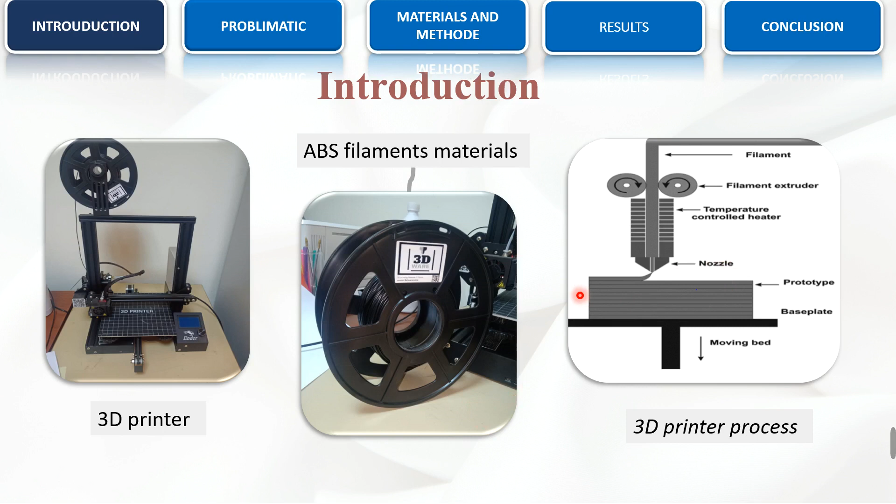The 3D printing technologies are widely used for the production of polymer components from prototypes to functional structures with difficult geometries. By using fused deposition modeling, it can form 3D printed parts through the deposition of successive layers of extruded thermoplastic filaments. The 3D printing can create physical objects from a geometrical representation by successive addition of materials. It is also a manufacturing technique to produce components in 3D using computer-aided design.

Because of the expensive price, permanent mechanical properties and chemical composition of the filaments, and also the useless waste plastics, a new solution is about extruding the raw materials of the 3D printer, starting with computer-aided design software for all parts and finishing by realization of the test bed.

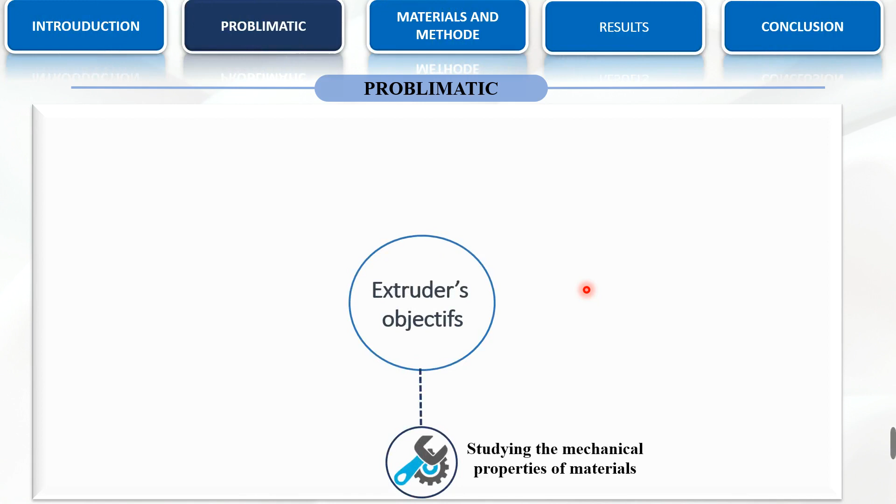However, this is about creating and producing the filaments used, for the purpose of studying the mechanical properties of materials, making the raw materials available immediately, reducing the price of the filaments used in 3D printer, and recycling waste plastics.

The extruder is a long continuous process of the polymers. It's used to produce tubing, tire treads, and wire coverings, so it pushes the raw materials into a heated tube, heated by two heaters fixed in the external side of the tubes.

The pushing process uses endless turning screw turned by a motor, then compressed into a shaping die which is used to extract the final product as filaments of 1.75 and 2.5 millimeters.

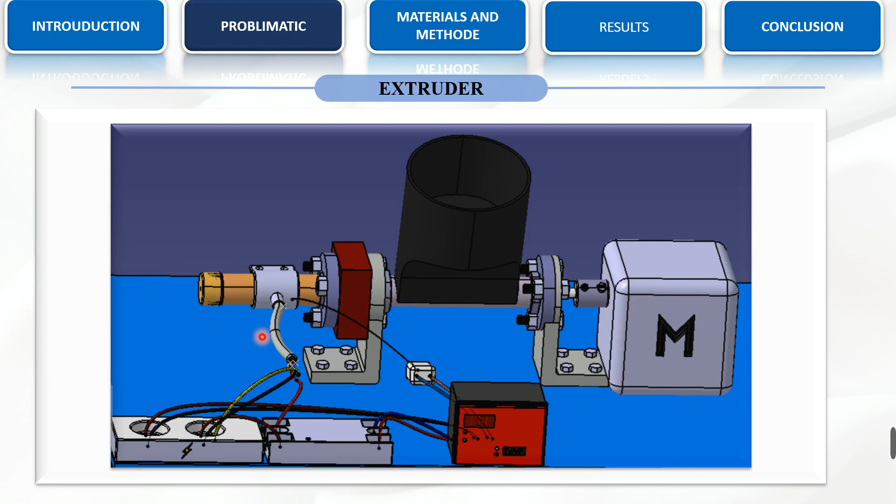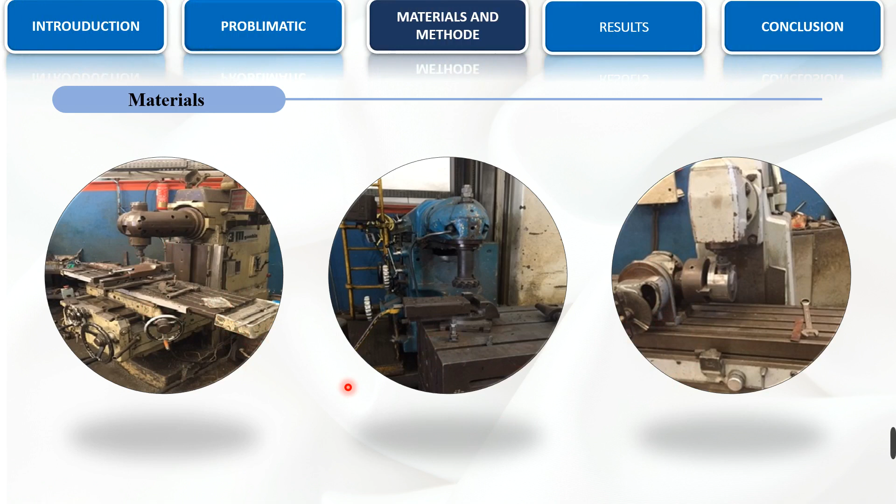So starting with the design using computer-aided design software, then fabricating the parts using mechanical turning machine, mechanical milling machine, the laser machine were used to perforate the shaping die with high precision of 1.75 and 2.5 millimeters.

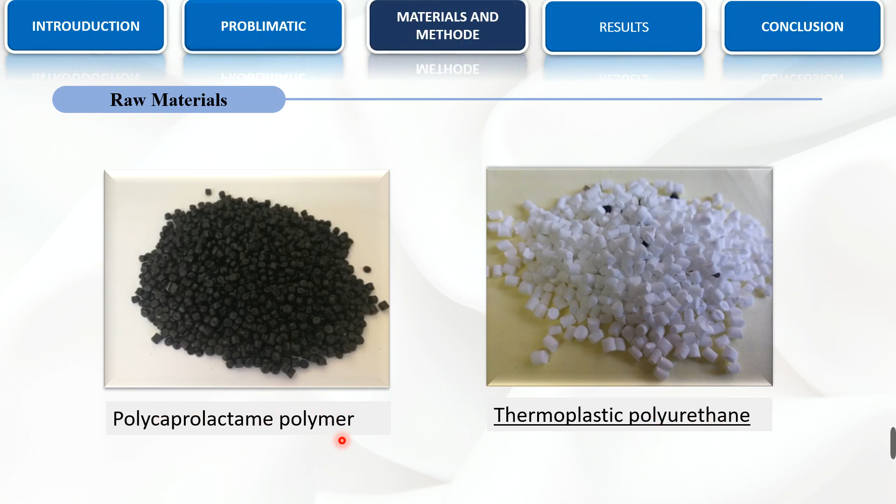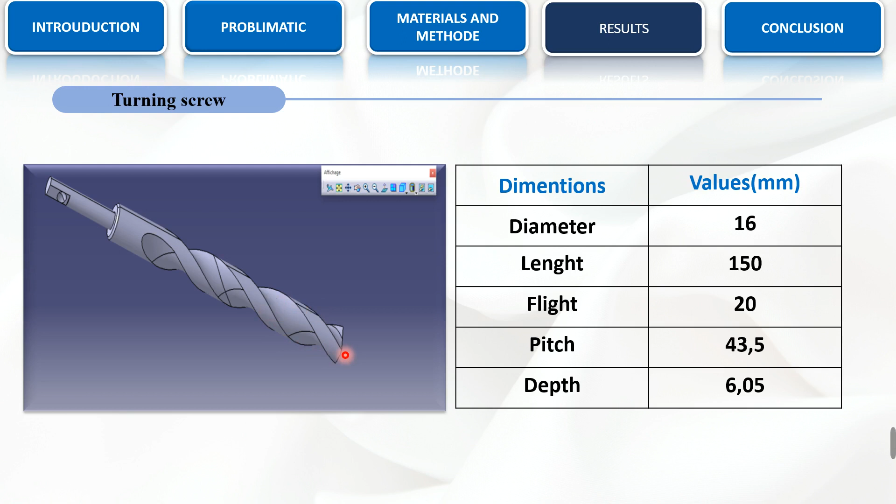So here we see the turning screw used has 16 millimeters in diameter and 150 millimeters as a total length, assuring the transfer of thermoplastic materials in order to be extruded in different final forms, thanks to its rotation around its axis of revolution and the geometry of the flights which have 20 of width for each, while fixing the pitch at 43.5 millimeters between each two successive flights with 6.05 of channel depth.

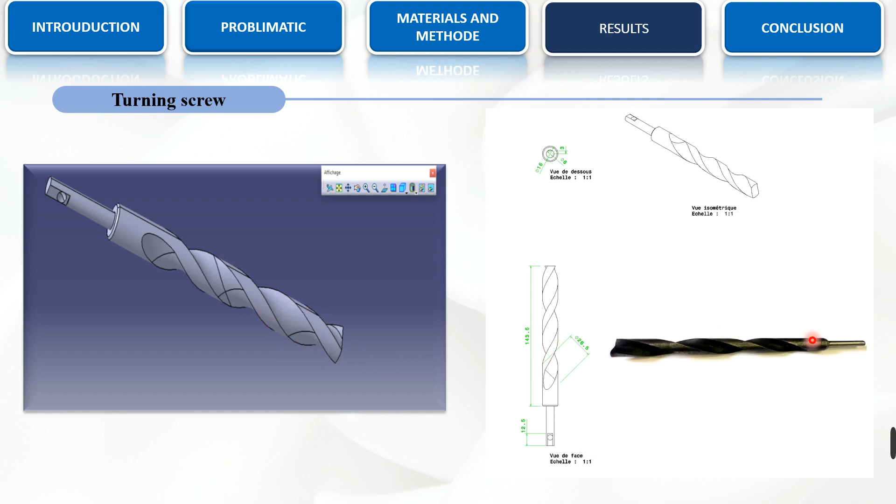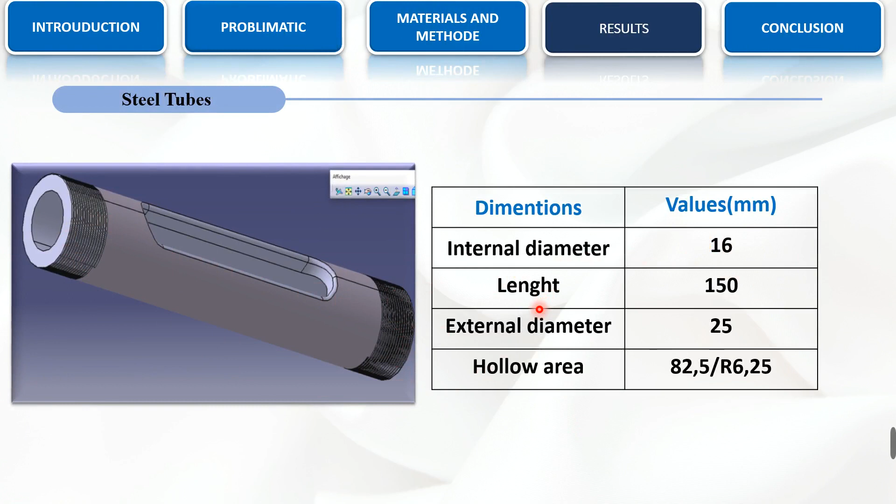We will pass now to see the steel tube which works as a chamber housing for the screw. The raw material is fed into the chamber through it. The tube used has 16 millimeters as internal diameter, 25 of external diameter, and 150 millimeters as a length, with a hollow area in the lateral surface which is consecrated for the material feed.

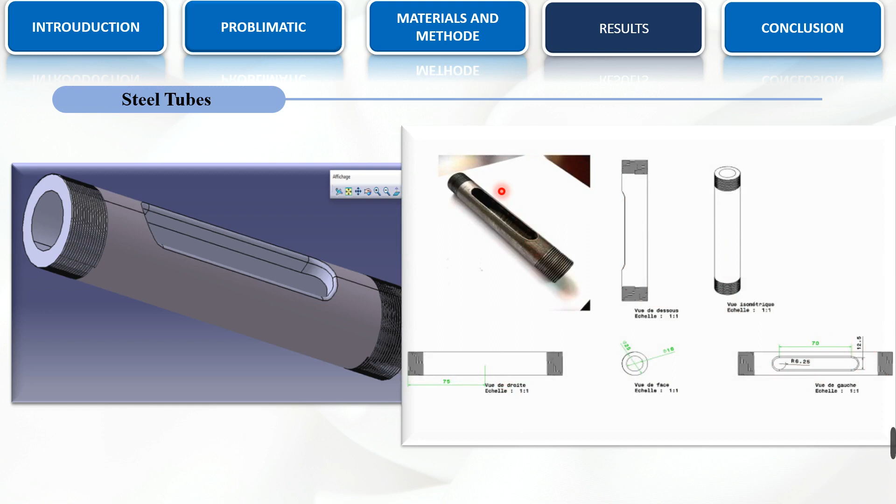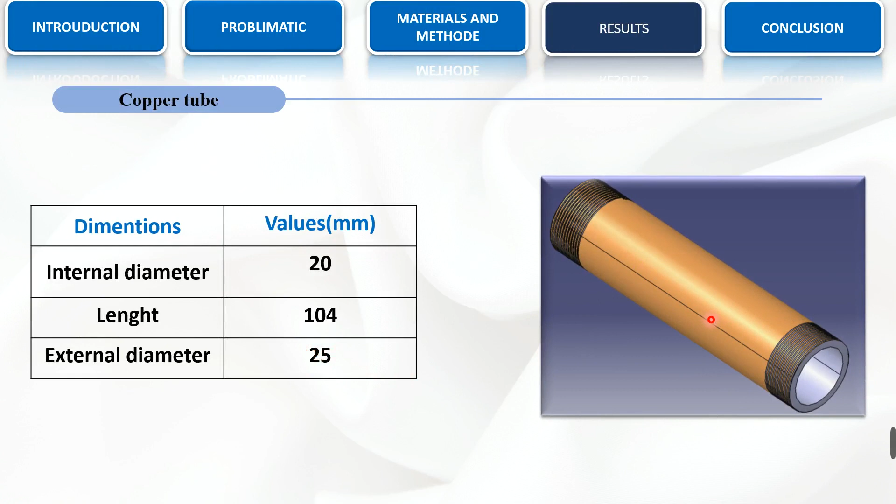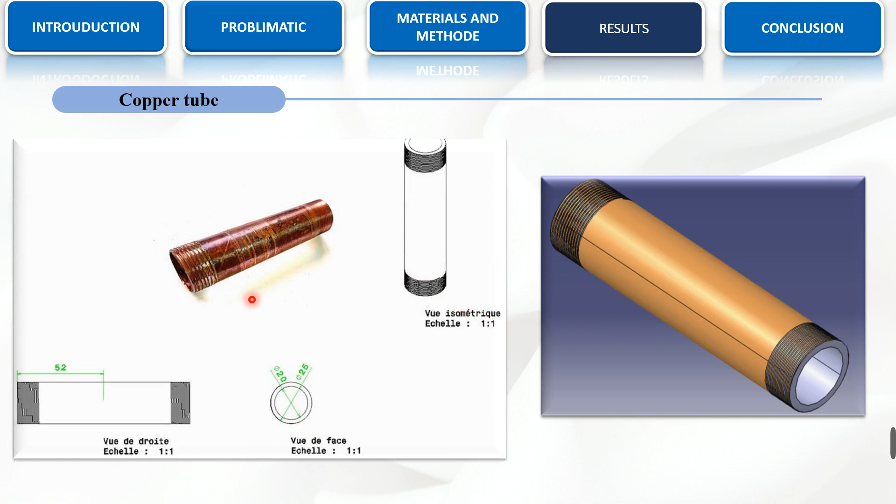So we are seeing now the copper tube, which is fabricated of copper material, which has a high thermal conductivity reaching 386 watts per meter Kelvin, 104 millimeters as a length, 25 and 20 millimeters of external and internal diameter respectively, to assure the fusion of the material inside by increasing its temperature thanks to heaters fixed on the lateral surface of the tube.

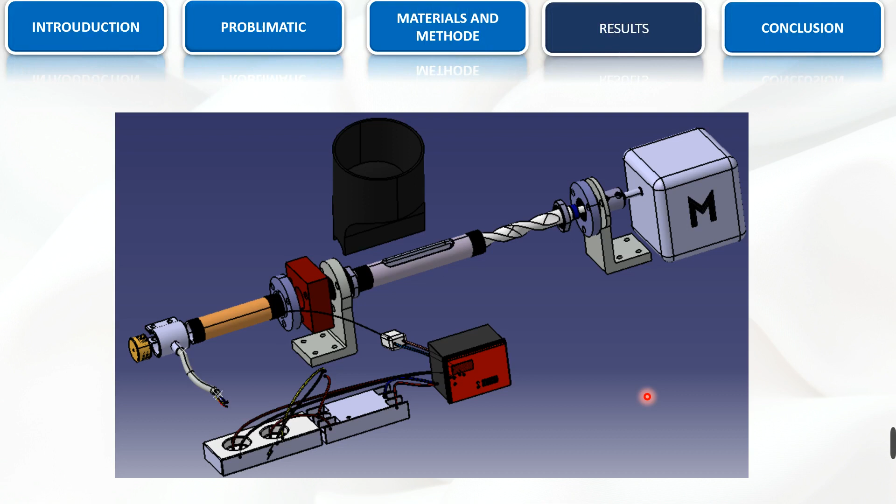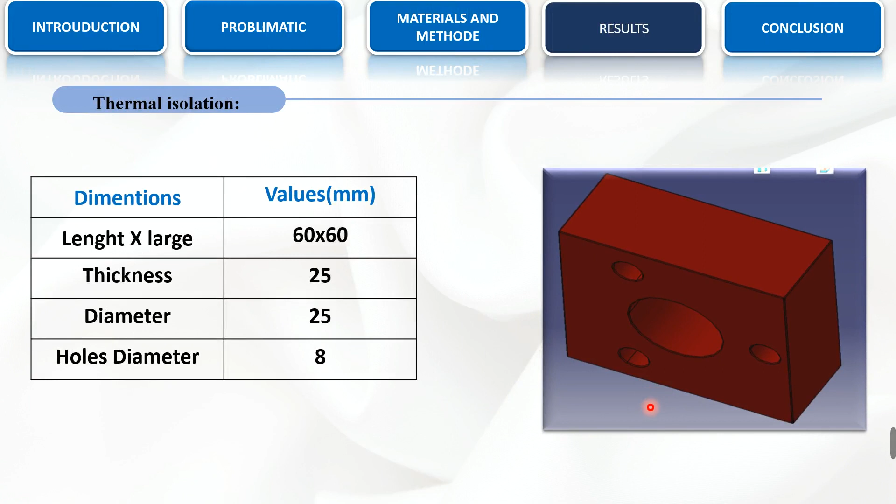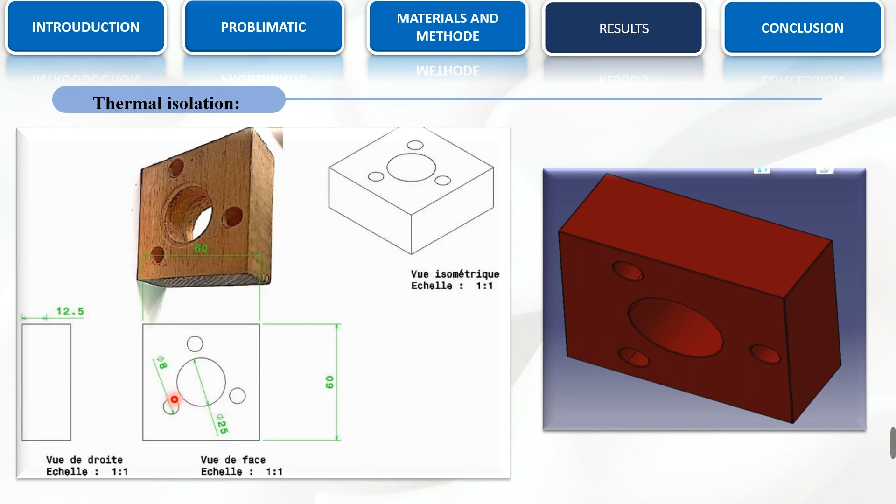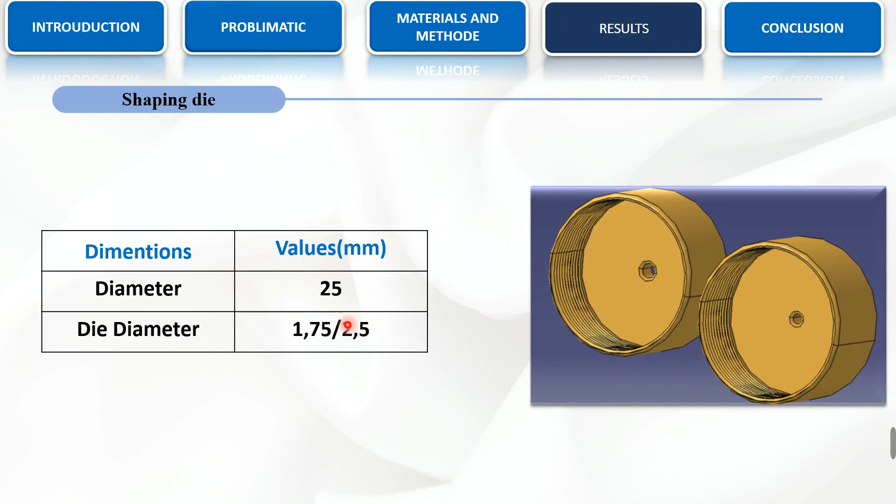So here in this experiment we will use two shaping dies. One has 1.75 millimeters of the little hole diameter and the other one has 2.5 millimeters, generally made of brass because of its capacity to withstand high temperature.

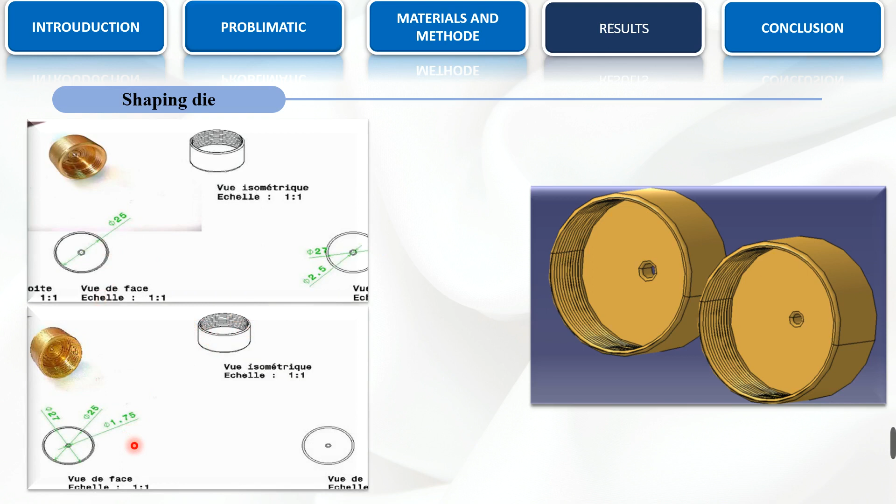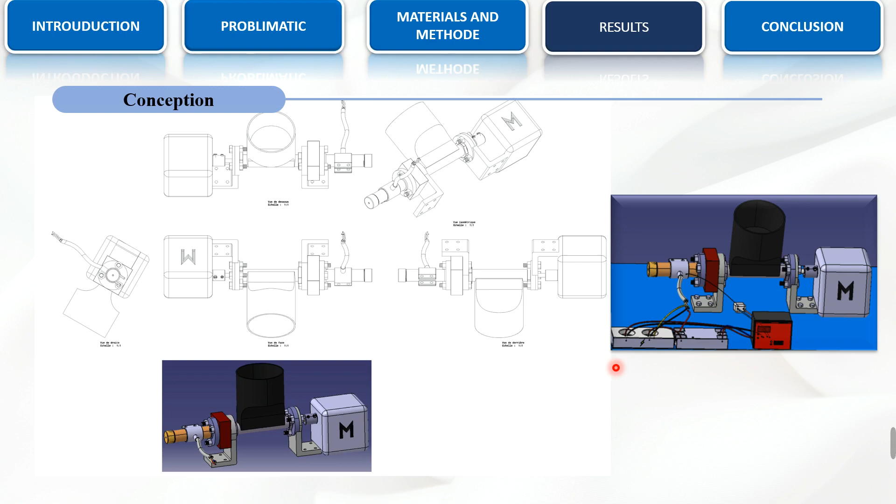So here we have the final design of the extruder, which is assembled by computer-aided design software, while including also the electrical parts in the system, which you can consult in the presentation of my colleague Naboulssi, which is about the control of the 3D filament extruder.

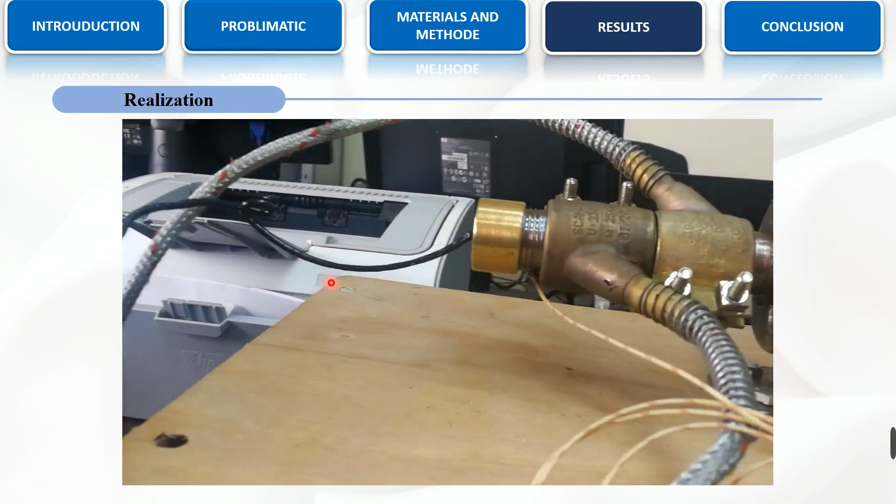So here, as you see in the video in front of you, which shows that the machine works perfectly, which means that we succeeded in producing the filaments with two different diameters.

So here, the goal of this study was to investigate the mechanical properties of the produced filaments and also the additively manufactured parts using the extruder.

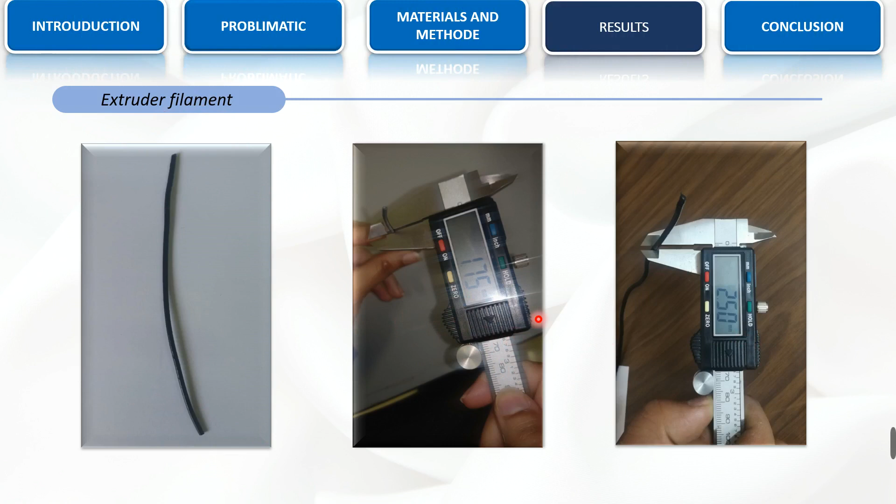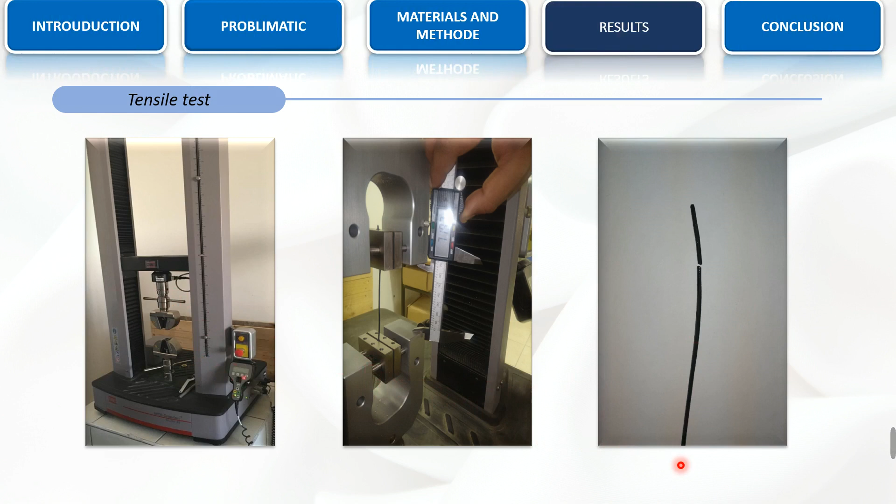So here we have tensile testing on the extruded filaments undertaken based on specimen geometry of 150 mm as total length and 71.69 mm for gauge length.

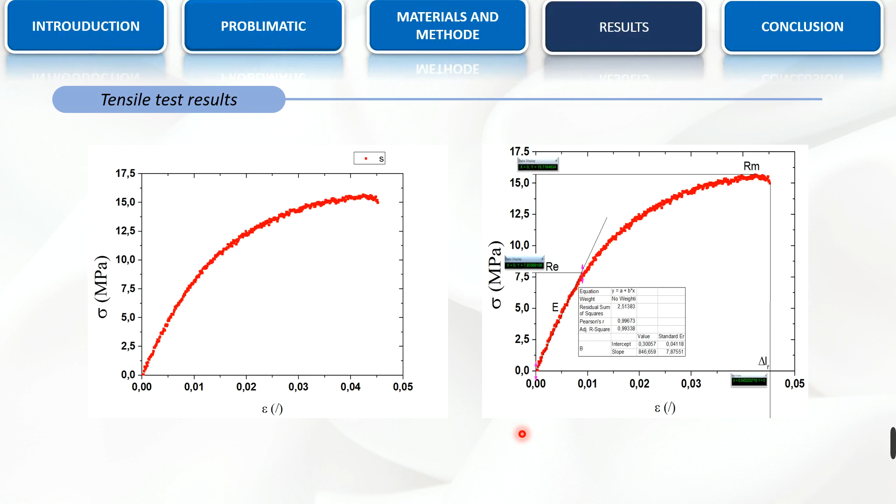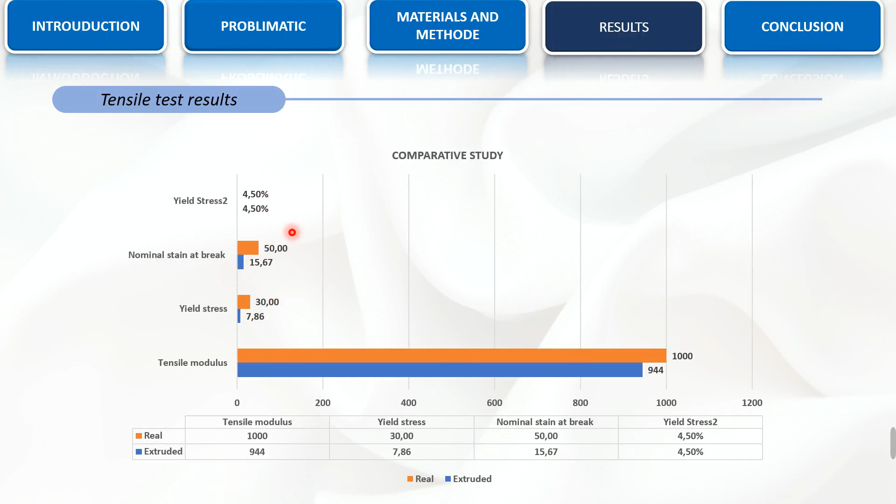Okay, so here we have the following graph which presents the different properties between the real PA6 one and the extruded one, which are close to each other, but we realize that the only difference between them is because of the micro inserts in the extruded one, while also showing the mechanical behavior of each of the specimens analyzed.

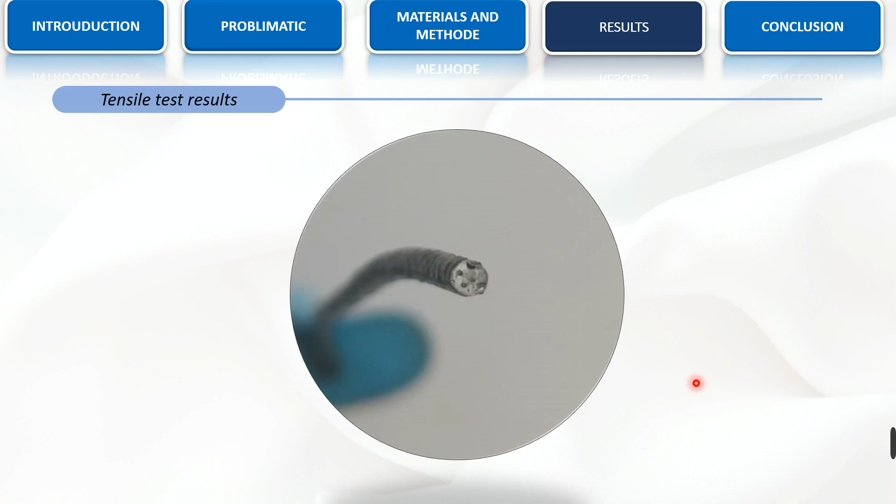So as a conclusion, we can say that in this research we made a plan to design and produce the filament extruder, starting with conception on software design and ending with realization. Finally, filament extrusion parameters have been studied.

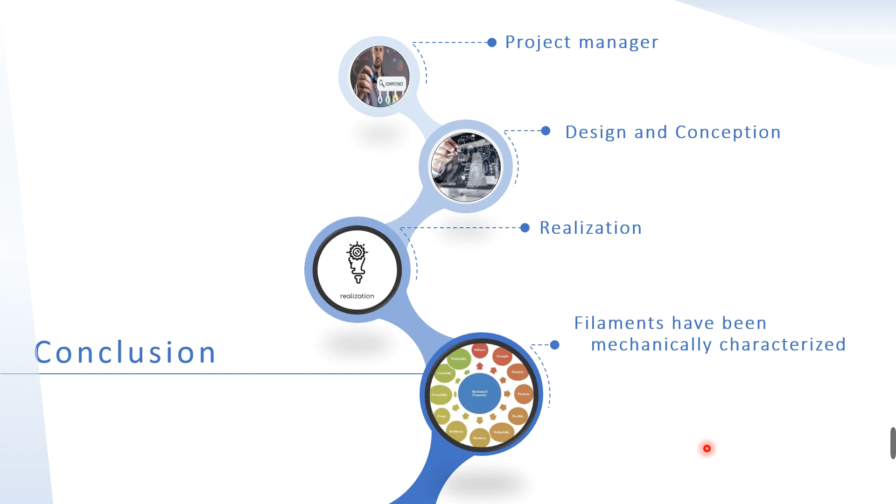Also, material filaments have been mechanically characterized. The mechanical properties obtained in our manufacturing filament are considered satisfactory. Time and cost have been reduced. A workflow manufacturing filament extrusion system has been developed.